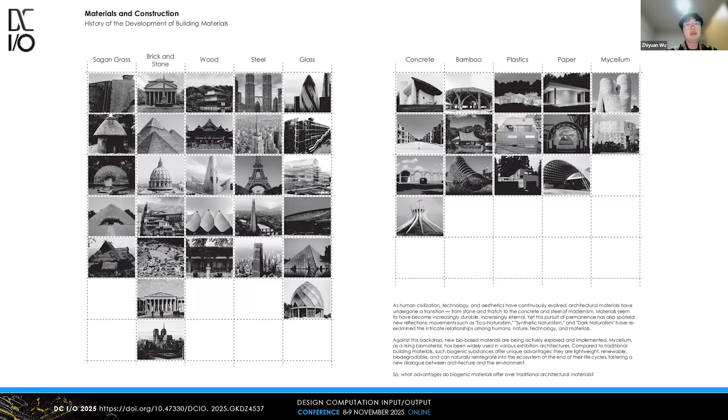So our project begins with a fundamental question: how can computational design engage with living, time-sensitive materials to enable architecture that learns and adapts over time? To explore this, we first studied existing examples of material aging in different climates. At Angkor Wat in Cambodia, humidity and biological growth cause surface erosion, whereas at Machu Picchu, temperature variations and air dryness create cracking instead.

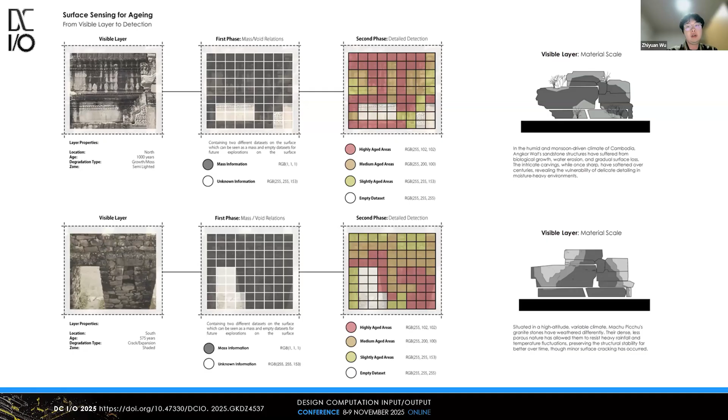So if we measure these erosions from a digital perspective, in the first phase, visualized textures can be mapped into a mass-void dataset, and then we perform pixel-based aging detection through color differentiation. This approach attempts to translate material changes into quantifiable data inputs.

From these observations, two core questions emerge. How can we construct such bio-buildings by controlling each stage of construction, and how can we create a documentation system to allow future applications for change? To examine these questions, we try to separate traditional continuous architecture into fragmented, coded pieces. We revisited the mosaic tradition, the layering logic of architecture, and the regeneration capacity of biological materials to establish a computational framework for bio-adaptive construction.

Here, we reinterpret Stewart Brand's concept of shearing layers, the idea that different components of a building change at different rates. Traditional systems rely on fixed connections and static hierarchies implying permanence. Our Biotessera process instead introduces interlocking and bio-adaptive connections, where each layer, the structure, the skin, and the surface, is capable of aging, decaying, and regenerating independently.

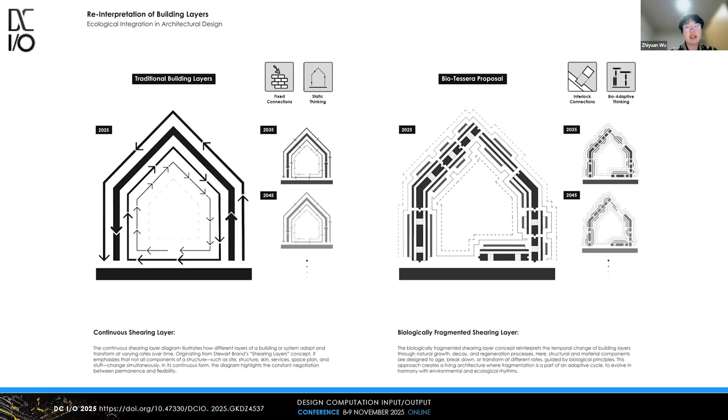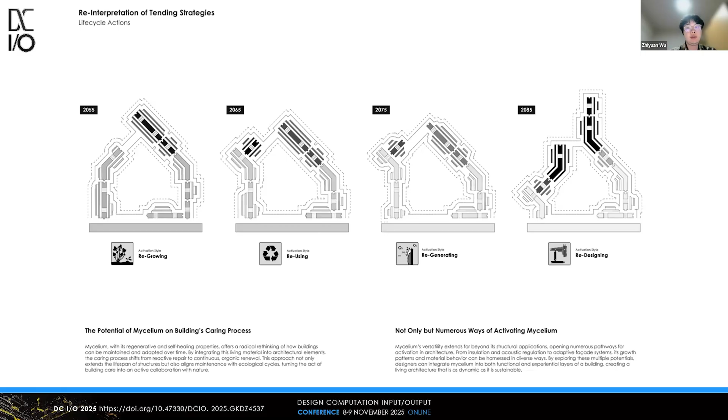Extending this logic, we explored how biological growth can redefine maintenance from passive repair to active regeneration. So we propose four temporal strategies: regrowing, reusing, regenerating, and redesigning, corresponding to different decades of transformation. This process focuses on fungal mycelium, transforming maintenance into an active and continuous process throughout the building's lifetime.

So why are we using mycelium? Because mycelium embodies a philosophical principle: it sustains life through regeneration and fusing. From our perspective, mycelium has the following three characteristics. The first is that mycelium undergoes a predictable biodegradation process, from dense to porous, from inert to eroded. This transformation lightens mass, reduces maintenance, and reintroduces matter into ecological cycles. So for architecture, it means end of life no longer equals demolition.

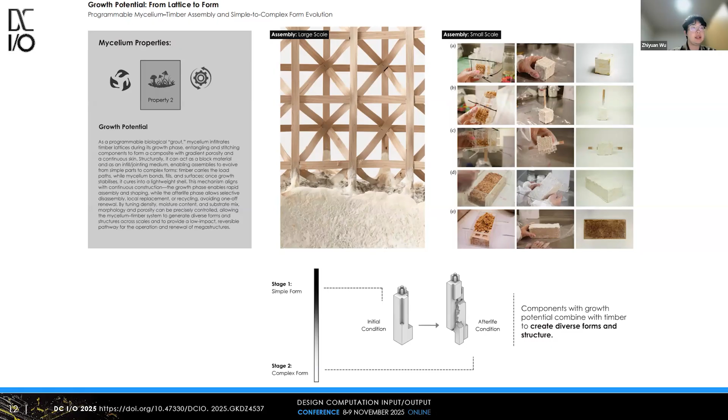The second is that during the growth phase, mycelium can grow together with wood structures to form composite structures. This programmed growth enables modular assembly and reversible renewal, allowing architecture to evolve dynamically while remaining low impact. Finally, the potential of mycelium lies in its global accessibility and reproducibility. Fungal species exist across diverse climates, enabling local cultivation and digital fabrication.

Given the sensitivity of mycelium to environmental conditions, it's particularly important to first create a method that can be driven by environmental factors. By compiling CFD-driven climate voxels with the site, we generate massing strategies and material allocations that are forecast-driven rather than form-first. This diagram summarizes the end-to-end workflow of our design.

We begin with the voxel data input, the wind, the sun, and the urban context, then proceed to massing generation, where the original massing is evaluated through sun analysis, vertical circulation, and area separation. The output informs material allocation. First, voxel merge harmonizes across multiple fields. Second, allocation logic encodes rules for performance thresholds. And last, space allocation distributes programs and material systems accordingly.

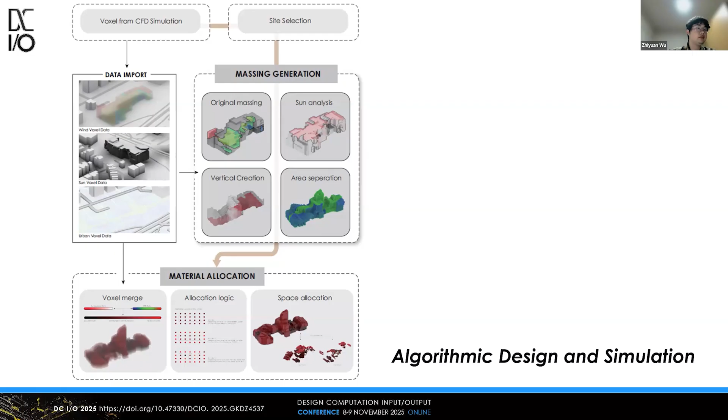This page demonstrates how to translate the CFD wind field data into the adjustable control ramps. So we read the wind speeds at each voxel and map them to a set of ramp functions, which modulate component densities, orientation, and scales.

On the left pictures, the CFD data is injected into a point cloud within the site bounding box. On the right, the distinct ramp logics generate different volumetric forms. So through these codings, we can precisely modulate the sensitivity to wind exposure while maintaining the module's reproducibility.

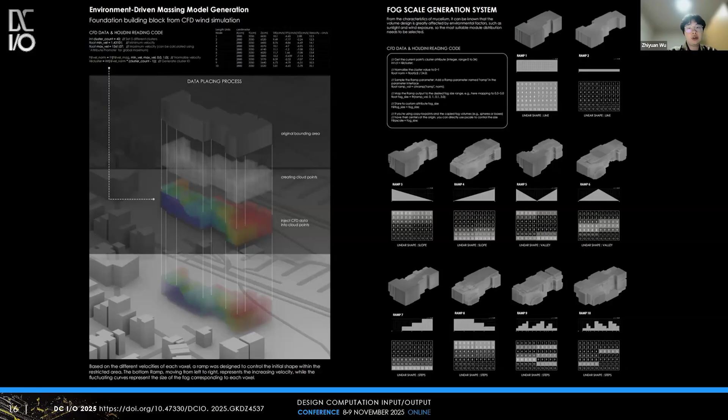To strengthen the research, we conducted monthly simulations. The wind speed and direction curves drive voxel response from January to December, revealing how exposed hotspots intensify. So this informs two design actions. First,

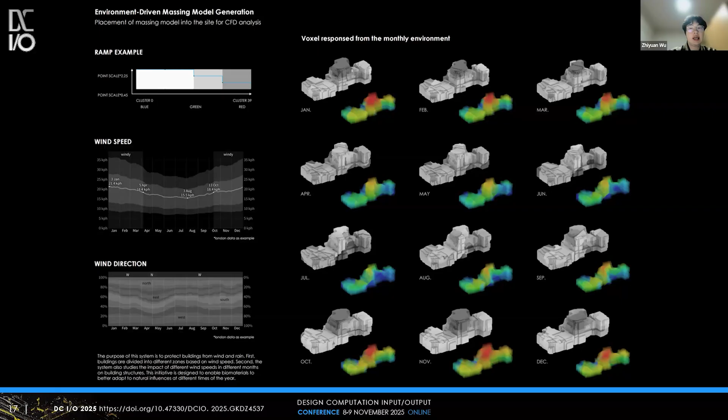zoning arrangements by exposure level to mitigate the wind and rain impacts steadily; second, biomaterial matching to deploy porous or shielding structures to optimal shore locations. So these temporal resolutions enable early planning of maintenance cycles and material lifespans.

Along with the wind field analysis, we also generate shadow voxels based on the multi-directional solar exposures. Average shadow depth drives vertical growth. The deeper shadow accumulation controls the height, while the bright areas guide upward expansions.

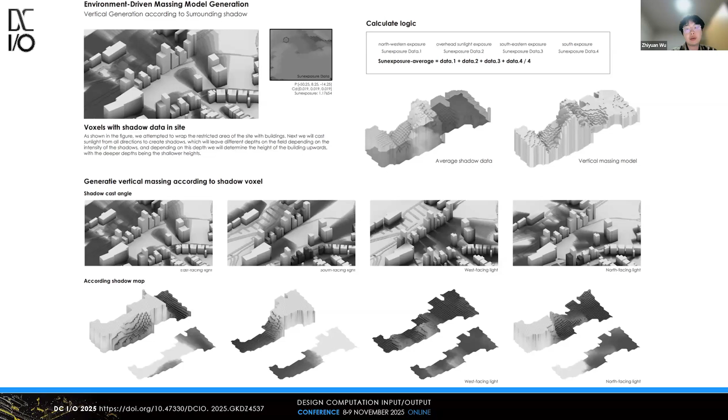So by analyzing exposure from the four directions, we achieve volumetric structures, optimizing daylight, retention, and thermal control through the height, stepbacks, and the porosity.

Next, if we have the data set of the environment, due to the relatively short lifespan of mycelium, a system capable of real-time monitoring the mycelium aging is required. We are using YOLO and CNN; we trained a detection model that identifies and classifies the aging conditions of

myceliums across regions. The samples are collected from London, Ankara, and Shanghai, representing diverse climates and environmental exposures. The workflow includes 3 stages: input, training, and result, leading to practical applications such as single block detections, composite samples, and full-scale digital reconstructions.

And this page presents the foundation for the machine learning detections, the long-term observation of the weathering process of mycelium across varying climates. Over a three-month cycle, we recorded sample conditions every 1.5 months in London, Ankara, and Shanghai, observing changes across dimensions including the volume, porosity, durability, weight, and color of mycelium.

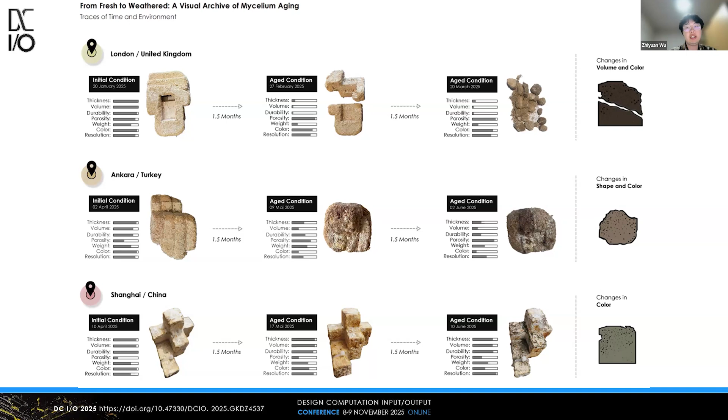Results indicated that London's damp, cold climate accelerates the volume loss. Ankara's conditions cause the surface to crack, while Shanghai's high humidity makes the color a little bit different.

So here we explain why we use the YOLO system. YOLO is originally applied in fields such as agriculture and medicine. No one has trained YOLO to detect biological materials. So our group intends to train it to detect the aging of biological materials within the buildings.

The third and final methodology is biodigital fabrication, where computational logic meets biological growth. This session introduces 2 hybrid connection systems, bio-welding and bio-bonding. Bio-welding focuses on mycelium to mycelium integration: 2 separate layers are cultivated and fused after 1 week into a unified continuous part.

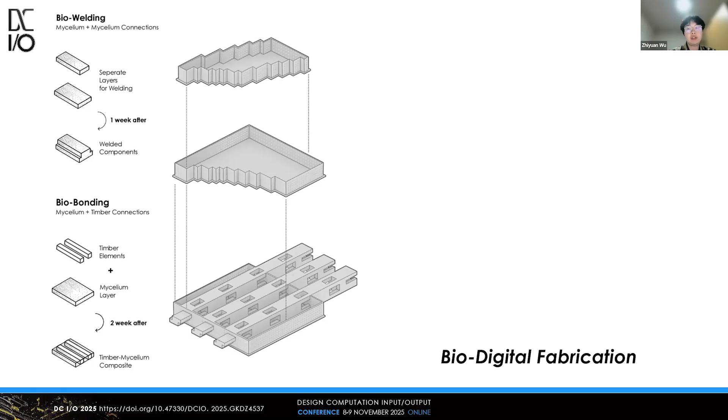Bio-bonding, on the other hand, explores the mycelium to timber interface, forming composite components after approximately 2 weeks. So to enable biological precision, we investigated porosity control in mold designs.

And this page demonstrates how voxel-based environment analysis can be applied to multiple designs. We utilize environmental data to detect potential mycelium growth points, translating this into variable pore densities. The resulting mold is calculated into 3 resolutions: high, medium, and low.

Each is adapted to distinct climate conditions: the fine pores for the high wind or rain zones, while the large pores serve sun-exposed surfaces. And this integration of climate simulation data with manufacturing logic transforms the mold itself into a climate-responsive bio-infiltration.

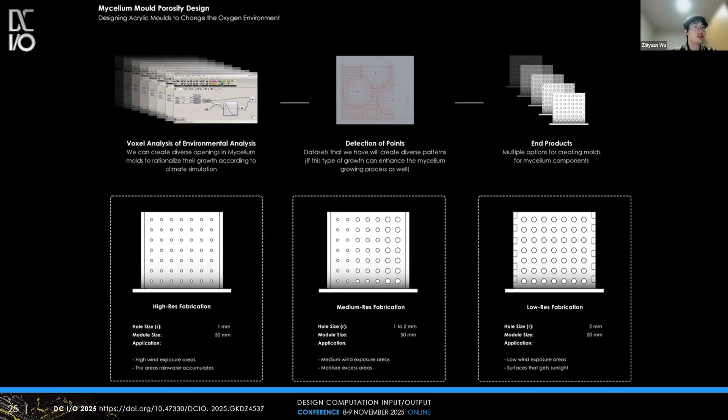Next, we present the oxygen control timber component fabrication. Through digital carving, we generated diverse pore configurations that balance weight reduction with oxygen. As illustrated, the prototype demonstrates how pore depths and spacing influence airflow and material densities. So by establishing the pore-oxygen structure mapping, we achieve a dynamic balance between structural efficiency and ecological responsiveness.

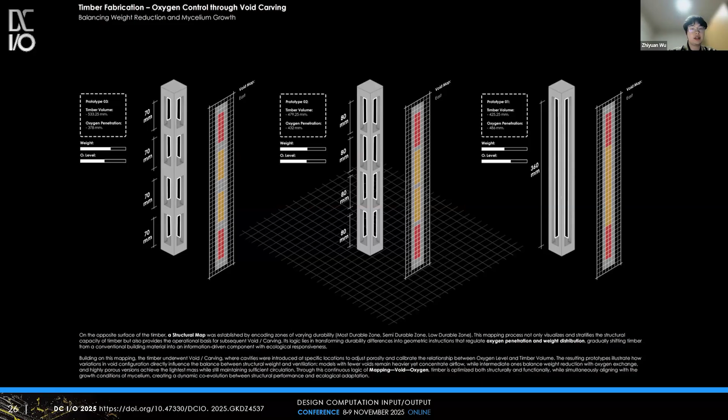So transforming the timber from a static building into a medium for expressive performance. So this page illustrates the manufacturing logic of acrylic molds. So before laser cutting, we progressively calibrate the pore distribution across each surface to balance the oxygen exchange with carbon dioxide accumulations.

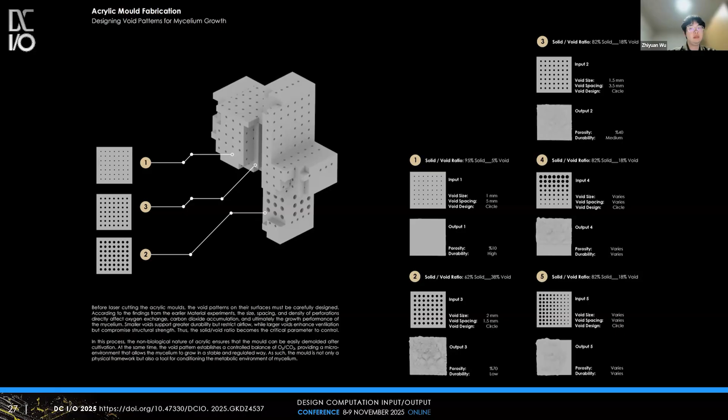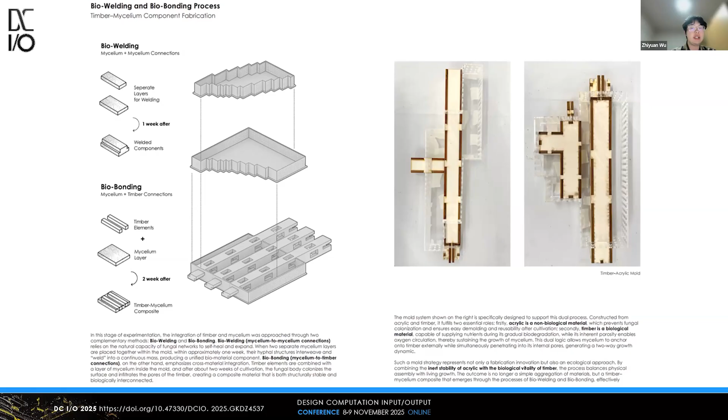Finally, the biowelding and the biobonding process brings the digital fabrication and the biological assembly together. Constructed from acrylic molds and timber framework, these prototypes enable controlled cultivations. The acrylic provides stability, while the timber introduces biological vitality. So mycelium grows within and around the timber, bonding the two materials together.

So the final section presents the results of our research, showing how the logic simulations, machine learning detection, and the biodigital fabrication combine together into ecologic systems. So we focus on both material level and architectural scale applications, demonstrating how the workflow operates from the micro growth

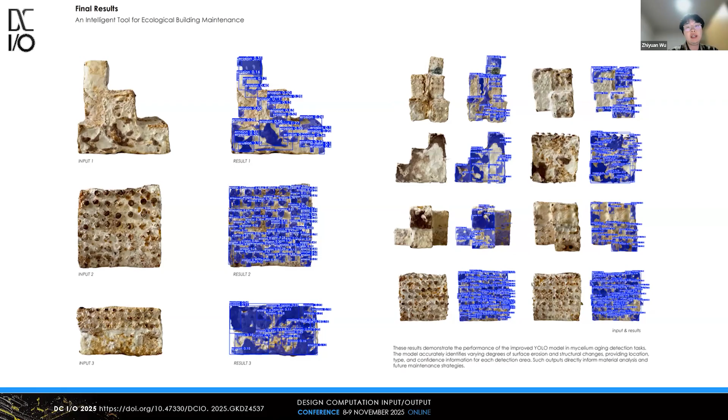feedback. So building on the trained model, we develop a simple real-time detection interface. The users can simply upload or capture an image, and the system instantly identifies aged areas with confidence levels and spatial annotations. So this interface translates a complex machine learning process into a simple tool for everyday monitoring, bridging scientific computation with architectural practice.

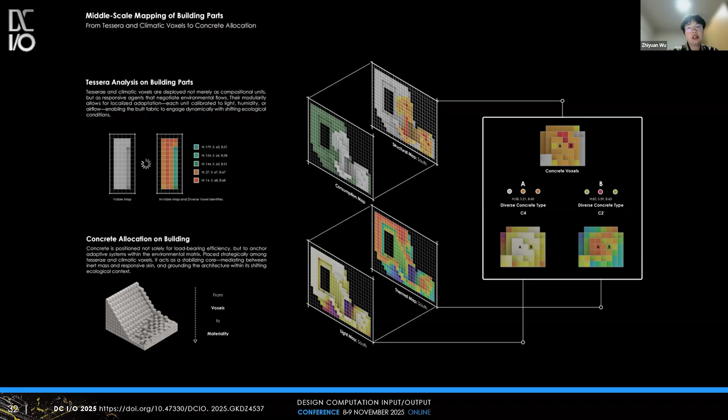So on the middle scale, we extend the monitoring system into a mapping system for building components. Through voxel-based analysis, each component is embedded with environmental and structural data. The concrete distribution at the base is no longer fixed, but dynamically arranged according to light, humidity, and airflow conditions, enabling the structure to adapt to environmental changes at the structural level.

So this page demonstrates the integration of environmental data and structural mapping. The left panel displays the structural load distribution diagram, while the right panel presents environmental factors, including illumination, temperature, and humidity. So through this overlay analysis, each voxel simulation carries dual structural and ecological information, providing precise guidance for subsequent material fabrication and allocation.

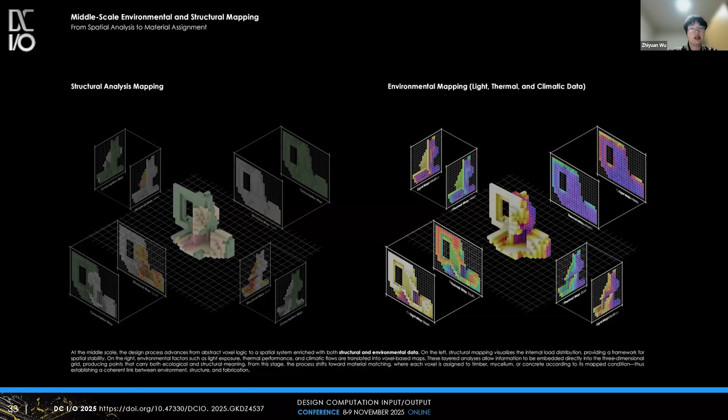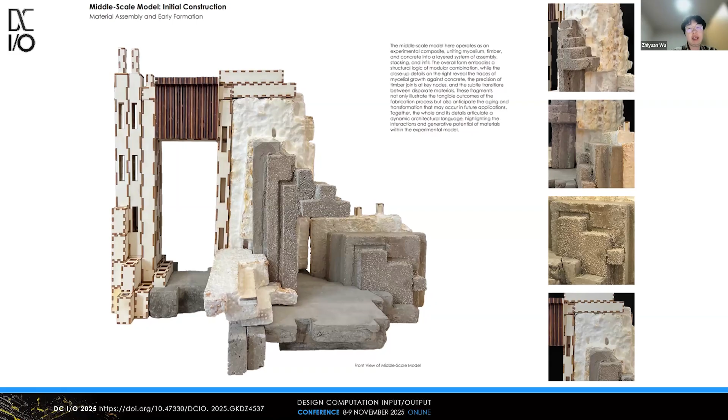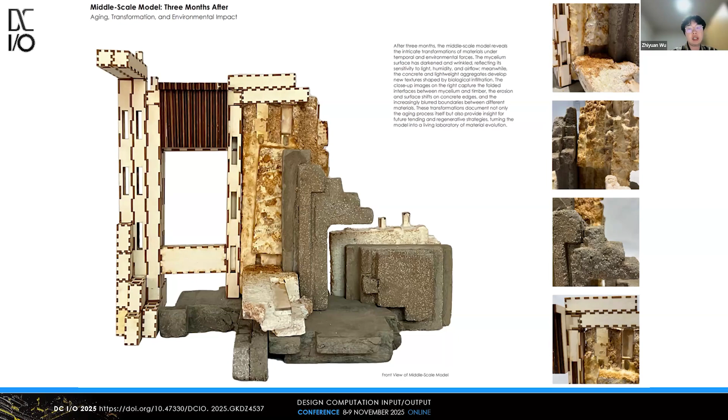So after 3 months, this model reveals visible biological transformations. The mycelium has darkened and wrinkled, while the concrete surface shows minor infiltration patterns. Timber edges eroded slightly, producing softened boundaries between the materials.

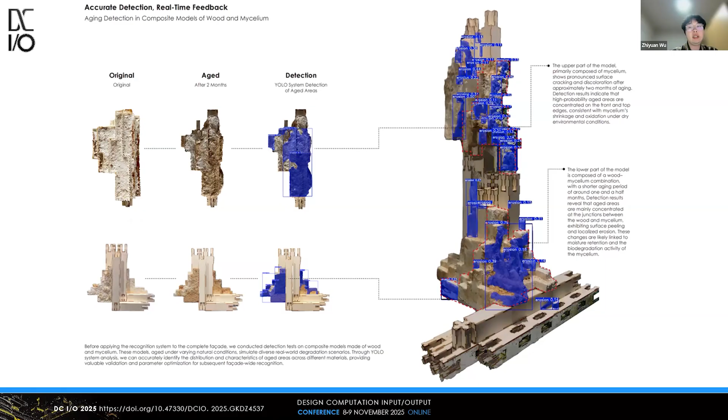So, additionally, we applied our detection system to wood-mycelium composite models. This result indicates that the aged regions were primarily concentrated at the material joints, specifically where humidity and biological activity were highest. So this experiment proves the system's capability to identify aging in real materials.